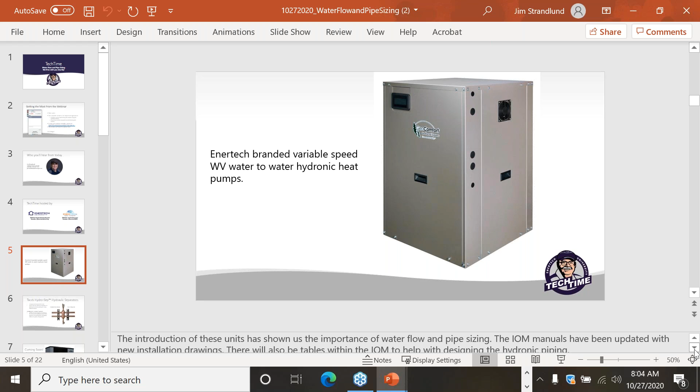The IOM has been updated with some new piping installation drawings, and I encourage you to take a look at the newest, latest version of this on the website. We're also going to be adding some things to help determine the size of the pipe and the type of pipe you like to use. This will be in a technical bulletin available for downloading today on the control panel, or it'll be sent by email to you as well if you like.

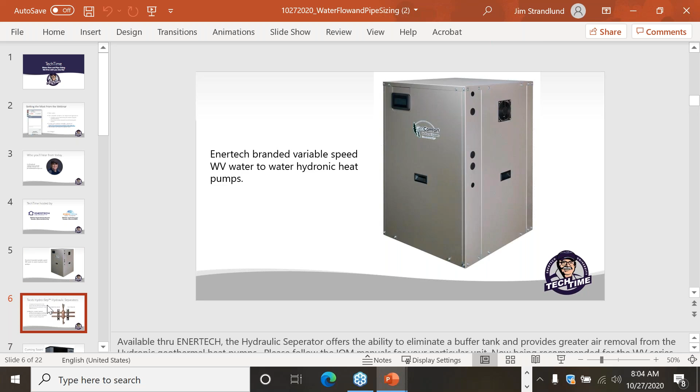One addition we're seeing used, especially on the WV, is TACO's Hydro-Sep hydraulic separator. It's a very interesting piece of equipment that's been around a long time, but it helps us eliminate more air getting back to the unit, so it's easier to purge the heat pump itself and then purge the rest of the system very easily.

This can also replace a buffer tank in some applications, and the installation manuals will talk a lot more about that, so please follow the IOM. It also makes it easier - we're using a couple of pumps now instead of one, so you can have smaller pumps to flow through the heat pump and through the rest of the system, the radiant zones, forced air zones, etc. You'll find this is a good add-on item that eliminates a lot of the air problems we've been seeing.

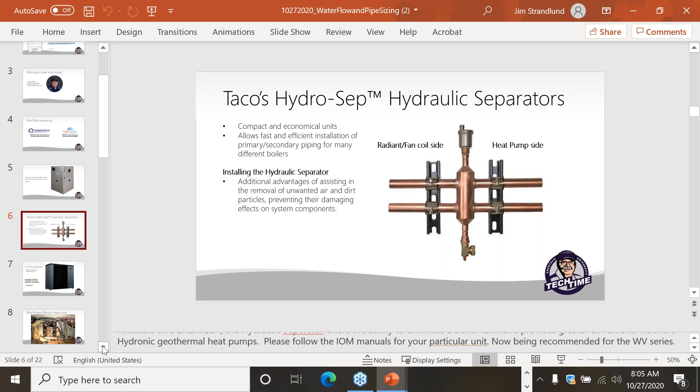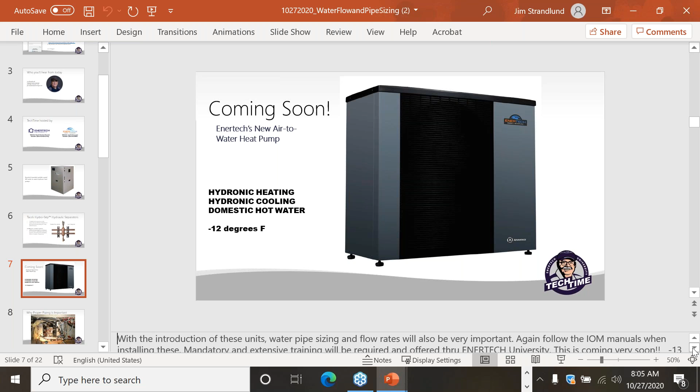What's important about all our hydronic stuff we're talking about today is that Enertech will be unveiling really soon their new air-to-water heat pump. This is a self-contained outdoor unit that we pipe the water from into the house, home, or business. This will provide complete hydronic heating, hydronic cooling, and will do domestic hot water. It's rated for good operation down to like -13, -12 degrees in that area. So following the IOM we're working on is very important to make sure we get it properly done.

This will have some extensive training coming out for release, and that'll all be available on webinars. So stay tuned - it's coming very soon to dealers near you, and it's going to be a really neat piece of equipment added to the repertoire of what we have available for our customers.

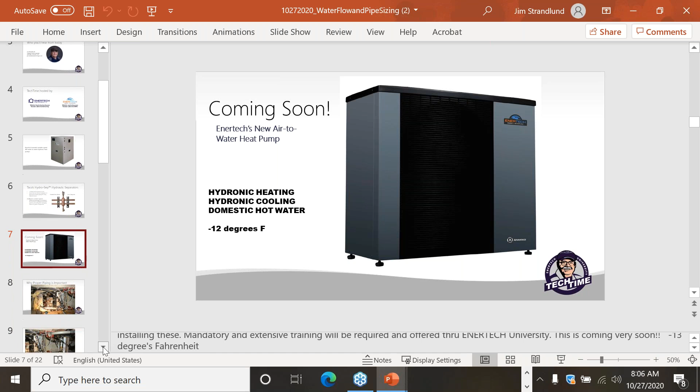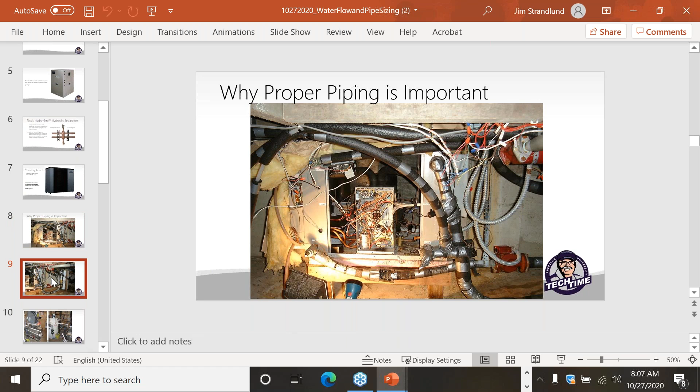This particular job on the next slide had a water heater used as a buffer tank. It was originally installed sideways at this job location, and it didn't work very good. So the contractor made him stand it up, and he made the homeowner cut a hole in his floor in a closet so that thing could stick up through the floor. I've seen some pretty wicked installations in my lifetime, and thought I'd share a couple with you.

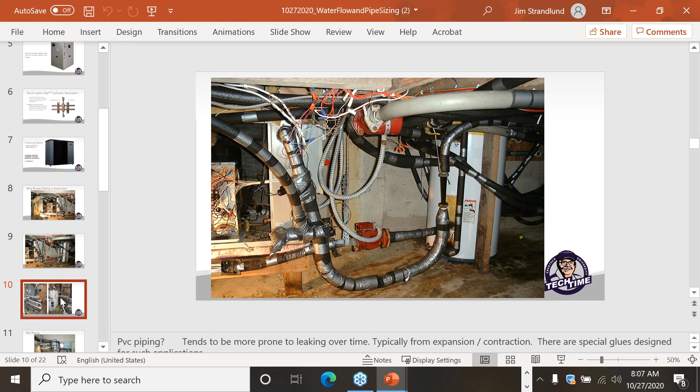Here's another one where we talk about piping with PVC pipe. Now, PVC pipe isn't always recommended by us. We find it's acceptable for non-pressurized flow centers, but if you use a pressurized one, it can have more tendencies to leak due to expansion and contraction, and isn't always the best thing to use. This could have been cleaned up and made to look a lot nicer than it actually is, but that's what the installing contractor had done.

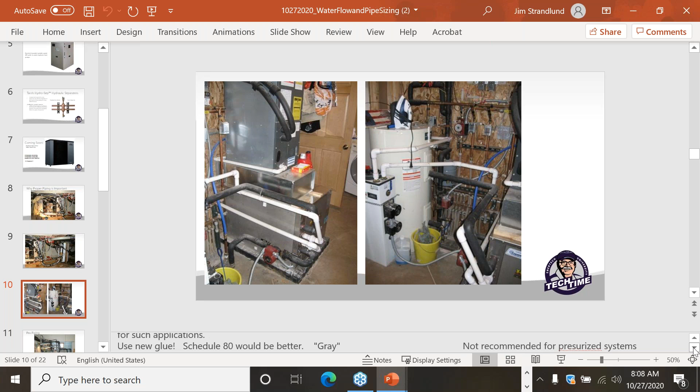If you're using PVC, look at Schedule 80. The heavier, thicker gray stuff is a little bit better. I've found through some specialty wholesalers that they have special glue for PVC piping that works better with antifreezes and methanols and things like that. They always recommend using a new can. Make sure it's a fresh can if you're going to use glue for your PVC piping.

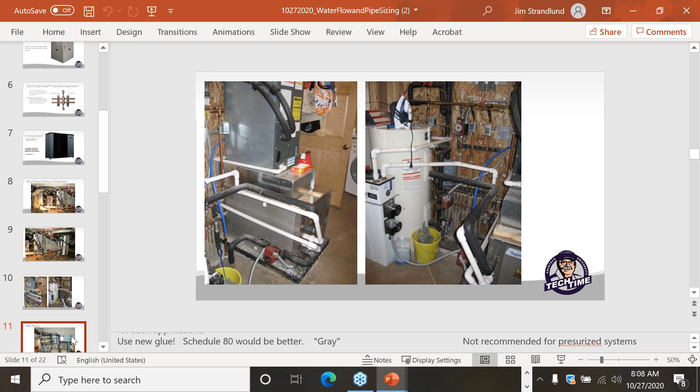Now, here's another job I had seen in my lifetime. Some of you guys may have seen this one before, but PEX pipe - it's another product that can be used for piping our systems, but it can be done in a little bit more efficient and neater looking scenario than this one was. There are some wicked installers out there that may not follow proper practices. I encourage everybody to do your due diligence, make them look nice, and make them perform well so we have a very long lasting system.

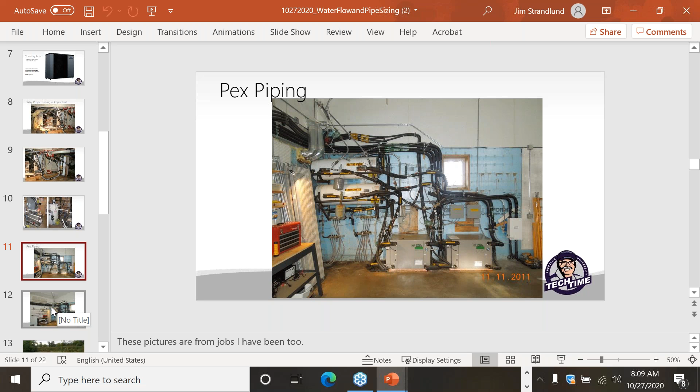Notice again, the buffer tanks on this one are mounted horizontally instead of vertical. I was called to this job to look at it, and I basically didn't want anything to do with it because the guy didn't want to restart it, start it all over. So I walked away from it. You can kind of see it's pretty - I'd be ashamed to have people see what this looks like. So again, do proper design and make things look nice.

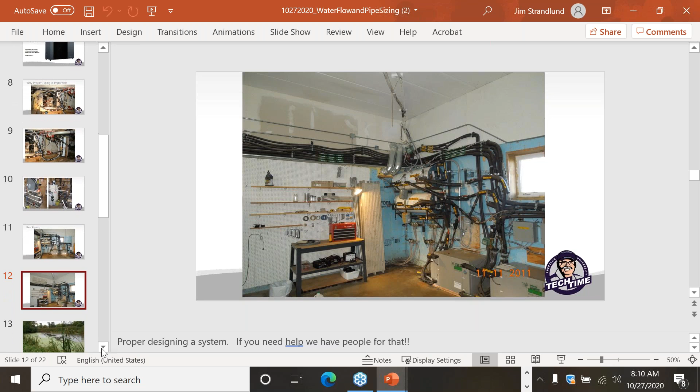Thought I'd share this picture of a pond loop system I ran into in my career. Obviously the contractor didn't do a very good job of tying all his pipes together. The homeowner told me that in the springtime the pipes would pop up and he'd go out there with a boat, tie a cement block on with a piece of rope, and sink it back down. I'm thinking there was a pretty big air issue with this, and we eventually removed all of it and replaced it with a new system.

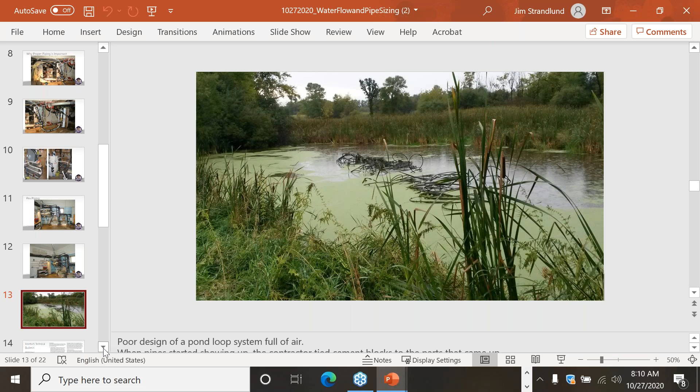So proper piping and design, not only in the loop fields but inside, is very important. And we'll get to some of the reasons here pretty quick.

We have produced an Enertech technical bulletin, TB20.007. I know it may be hard to read, but this is downloadable, and I urge you to download it, read it, and keep it. Give this to your installers. There's some really good information in here. This will be coming out in next month's In the Loop magazine also, so if you don't get it today, you'll see it in next month's program.

We start talking in here about proper pump mounting, the positioning of the electrical box or the motor on the units, to make sure it's in the right spot so we don't have trapping air. This will also talk about flow rates and pipe sizing, which I'll show you in the chart coming up. Very important - home run style piping is more preferred. You'll find that being able to purge everything in the mechanical room, all the in and outs for the different zones, the zone valves, makes it a lot easier and makes a nice, cleaner looking installation.

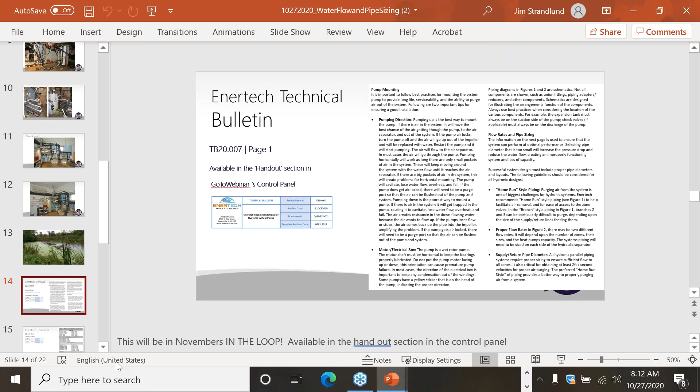So you'll find that this will be really helpful for all you employees.

We have a chart here showing the different water-to-water units we have, some MPH to MCH air handlers, A coils, multi-aqua fan coils, and some radiant floor. What we're giving you is the minimum GPM requirements for these pieces of equipment, so this can help you determine the size of the pipe you need feeding it.

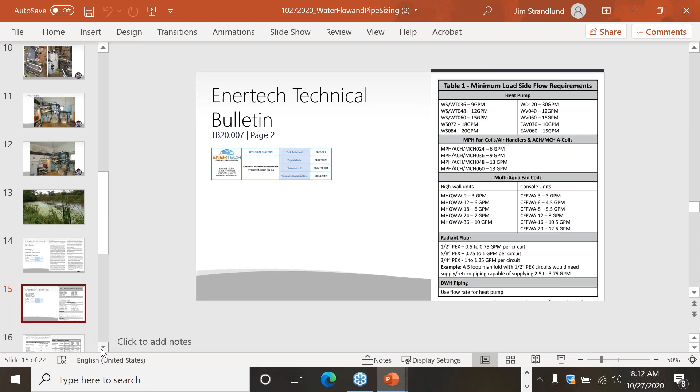So this technical bulletin is going to be really handy for designing, and even for installers, to make sure they're doing things in the right size.

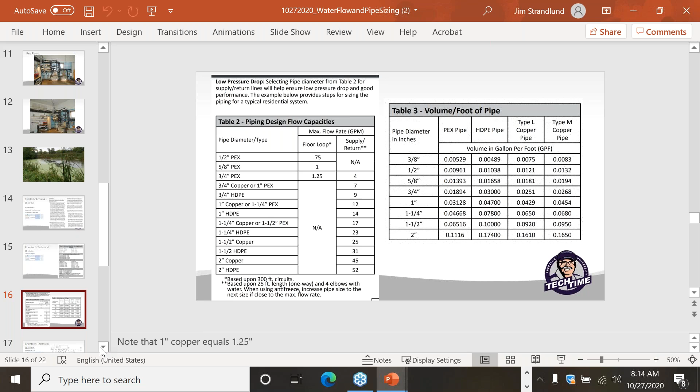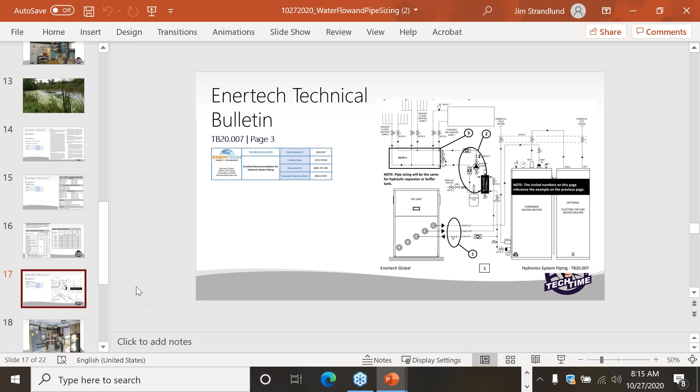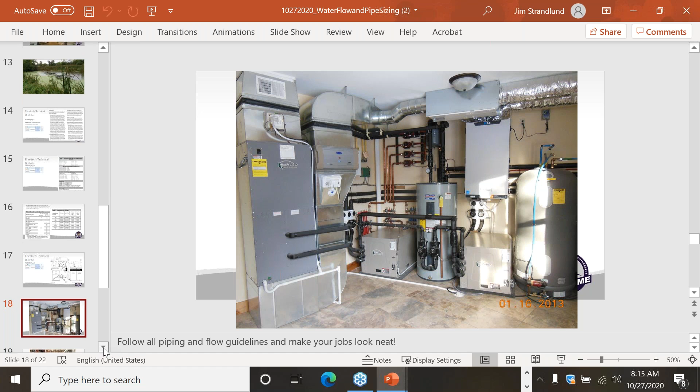If you follow our technical bulletins, technical diagrams, and charts, they'll help you get a more successful installation of your products. In the end, we hope your projects can look more like this, with the neatness of the plumbing and piping, more respectable for people to see, and homeowners more satisfied with what their project looks like.

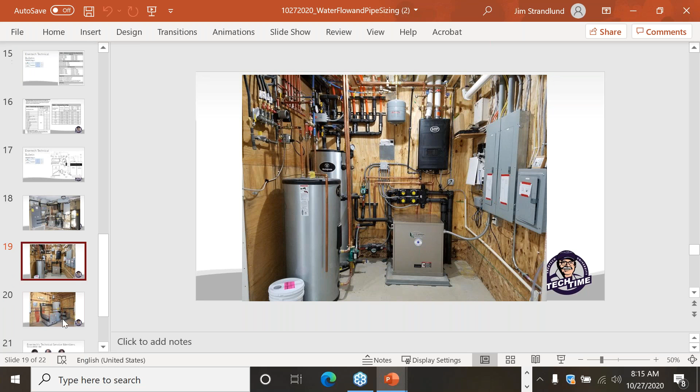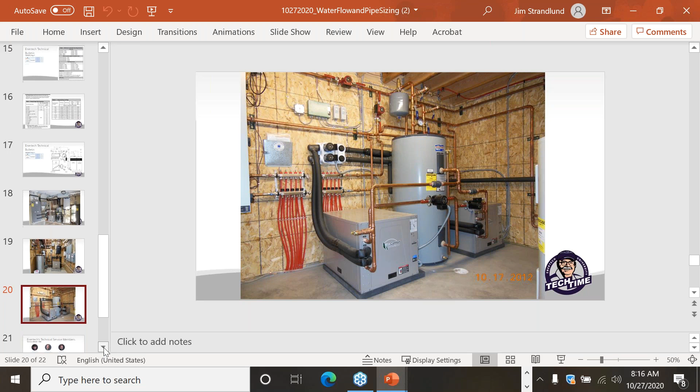In the end, our goal is for all of you to do a little better job, make things look nice and neat, and have greater success. We all know warranty calls are no-win situations, nobody gets paid well for the time it takes to do some of these. Proper installation will make it less likely to have problems down the road.